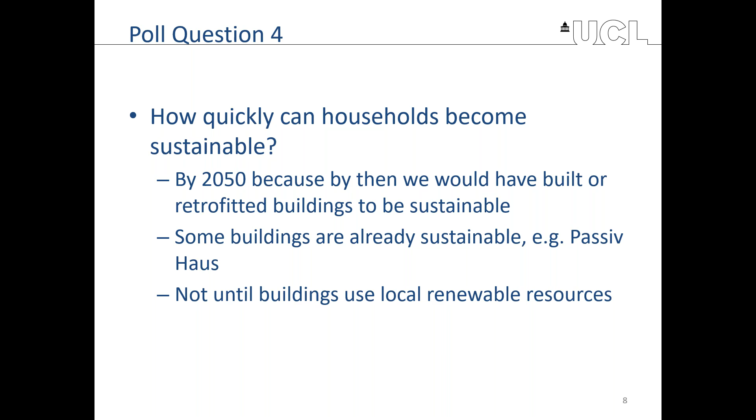But in fact, most interventions into building must tick the economic box. You would never invest in something that was economically infeasible. So in many respects, the economy takes a bigger circle, if you like, than all the other aspects. Now, we know we have to do environmental impact assessments, and there are minimum regulatory and legislative demands. So we know we have to do that environmental aspect of it. So we have to almost tick the boxes, and sometimes actually some of these assessments are tick box exercises.

And indeed, the society part, the social impact assessment, seems to have been tagged on almost to environmental impact assessments. So although, as I say, sustainability appears to be an equal weighting of all these things, in fact, they're not equally weighted at all. And this is one of the challenges to how deep sustainability assessment needs to be.

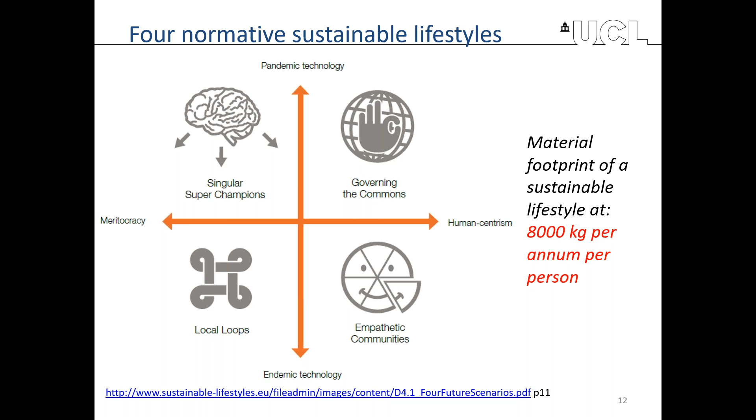To give you an idea of the scale of the challenge, 10,000 kilometers of travel in a car consumes 15,000 kilograms per person per annum. Public transport is far less, so it means that we'd actually encourage people not to use personal transport. Certainly 550 kilograms of food per annum was what you could do if you reduced your share of meat, fish and other seafoods. So again, food is a contributory factor, but I'm trying not to focus on all of the domains that we're interested in, just targeting the buildings.

So 37 square meters of personal heated living space costs us 10,000 kilograms per person per year, based on current ways of measuring. Now, already that's more than the 8,000 we're allowed. So the challenge is massive. When we were working on this project about 5 years ago, the average UK consumption was 40,000 kilograms per person per annum. So we're already at a scale 5 times too much to be sustainable. So it's a massive challenge on how to get here.

So in order to get this quantifiable footprint, we use these measures, but we had to have some caveats about the resources. Obviously, we pick up data about the resources used at a particular date. We don't get continuous updates on data, so your data is time-stamped, if you like. We can't get data for absolutely everything, so there are some gaps. And even with CO2 emissions, we do have some precision uncertainties. We can't be absolutely certain that we're measuring accurately. So already you can see that we can't be certain we can get exactly to this 8,000 kilograms per person per annum.

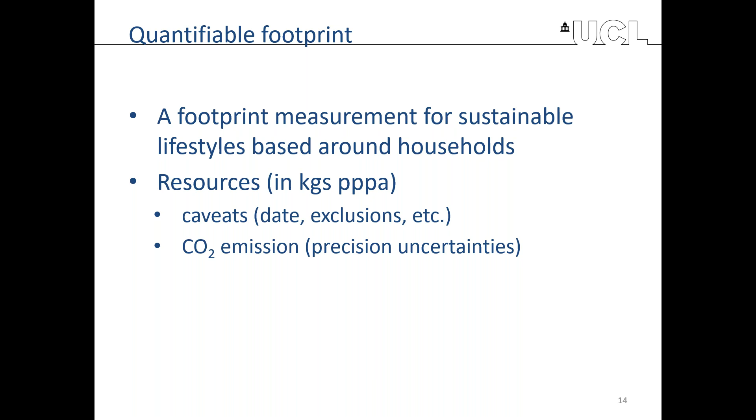So the 4 domains in the household envelope are the living domain, which is actually the building construction, the materials used for it, the insulation, the ventilation, the windows, the loft space, the floor, anything to do with the fabric of the building. Obviously, inside households, people consume food, and there are opportunities to reduce footprint through food innovations.

Obviously, mobility is a large part of the household, including space for the car, but actually the usage of the occupants in the house for consuming kilograms on mobility. And it's a trade-off then between, do you use it for heating or do you use it for your mobility? Likewise for energy. So on the energy domain, this is the ways that we heat and have power in the buildings.

Now, just to give you some examples so that you've got an idea of how these assessments are made and how these 4 interlapping areas can manifest when we look at particular innovations. So in terms of mobility, we might say, well, if you walk or cycle, that's great because you're not consuming kilograms, you're not contributing to CO2. So that's a really good sustainable innovation. In terms of the building, we might need a bike shed. So there's going to be some contribution to kilograms per person per annum because you might need some building to protect your bicycle.

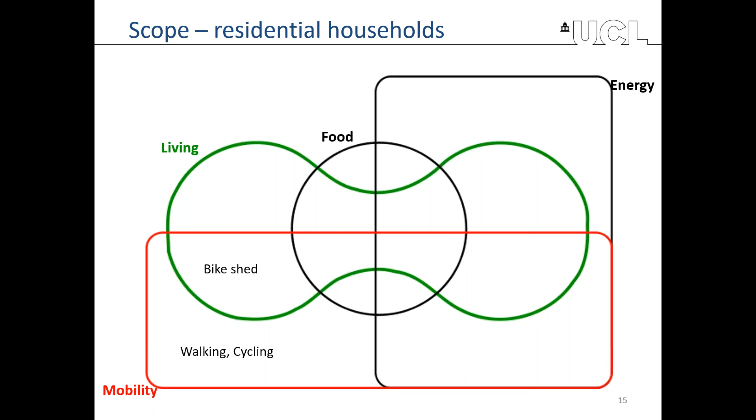If we look at the intersection of food, the residential building and mobility, then you might need a larder inside your building for travel food, and this could be some other storage means. If we don't consider the household fabric, you might say, well, we can use takeaways for food, but then that involves mobility.

So if we think about mobility and energy, we think about maybe internal combustion engine vehicles or electric vehicles. They contribute to kilograms per person per annum, but they don't affect the household particularly unless you think about charge points or maybe a garage to house the vehicle. If we want to think about food, you might look at the bio waste that you use for charging, maybe for electric vehicles.

And indeed, if you want to have the intersection of all four, you might think of bio waste that can be stored. So we might store some sort of generated electricity in a battery from food, but that can be used for the electric vehicle. So you can see how you can build up a map of all the innovations you might want to target in order to reduce your kilograms per person per annum.

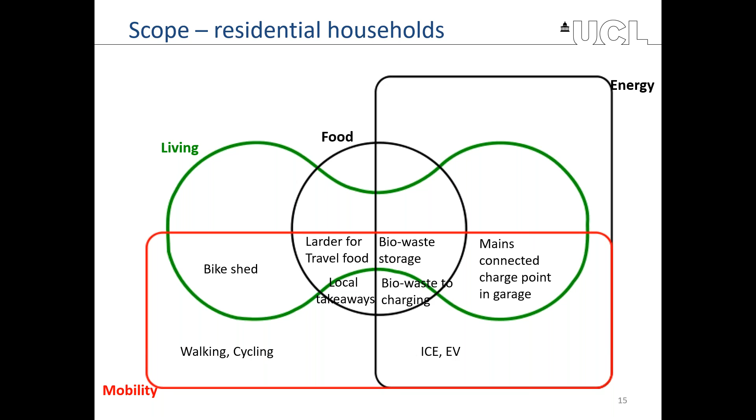Now, for these four domains, we need a way to describe each of the domains. And for the living domain, we've got these aspects of occupancy. So how many people in the building, how much space do they each have? What waste is there in the household? And this is not energy, so we're not worried about heat waste or food waste. This is just household waste.

What is the construction of the building? So what materials have been used? What insulation is involved? What is the location of the building? And by this we mean, is it in an urban environment or a rural environment? And what type of building is this?

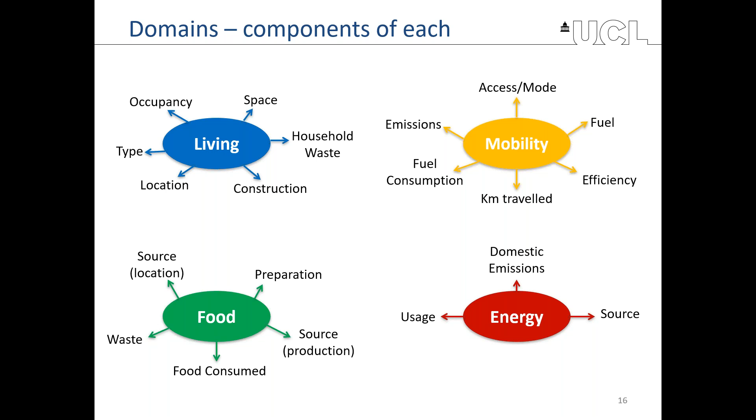And this aspect came up later in the day, this idea of living in a building that's not just designed for one family. So if you have some sort of shared facilities, even if it's just a shared corridor or lift or whatever it might be. So flats would be a type of building different from detached buildings, because it meant that you could benefit from others around you, because they would reduce your demands for living, even through shared walls or shared insulation, say loft insulation. So the type became actually quite important. I don't propose to go through these others, but I have got information if people want this.

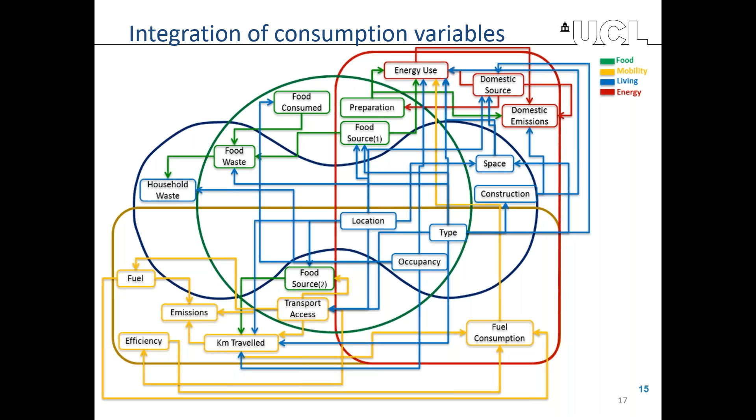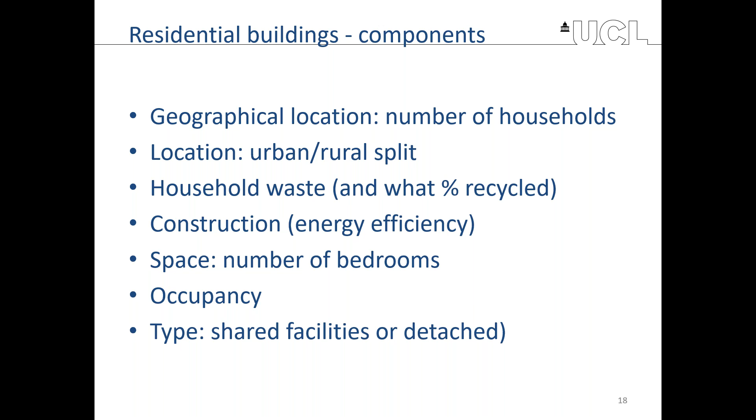So if you had less space to live in, it would mean you had less energy demand. If you had fewer people in the house, you would have fewer kilometers traveled. So these things are connected in multiple ways. I think I've actually discussed this with my previous slide, but this is just to confirm what the components of the residential buildings are. So I don't need to go through these again.

Now, we need to collect data about the households. And of course, we can't collect data about households for every location in Europe. So what we needed was a way for an input data stream to be created that was representative of the types of household, that would have all the data about occupancy, types of building and so on, but would not be geographical, but actually could represent a geographical location. So if you had all the data you needed about a city or a country or a region, you could provide that data, including how many households, and the model could then use it.

Now, the way to do this was to implement something that we call statistically representative distributions, or statistically accurate distributions. So you tell us how many houses there are of particular types. You tell us what the occupancy is. So say 2 people, there's a 20% chance that 2 people live in a particular house.

And the reason this is really useful is that national statistics can usually provide all the information we need because they're collected. And we've done this for 4 countries in Europe, and they were reasonably easy to get. But obviously regional statistics are available, and local statistics can be obtained as well. And just to give you an example of the sorts of information and how they differ between different countries.

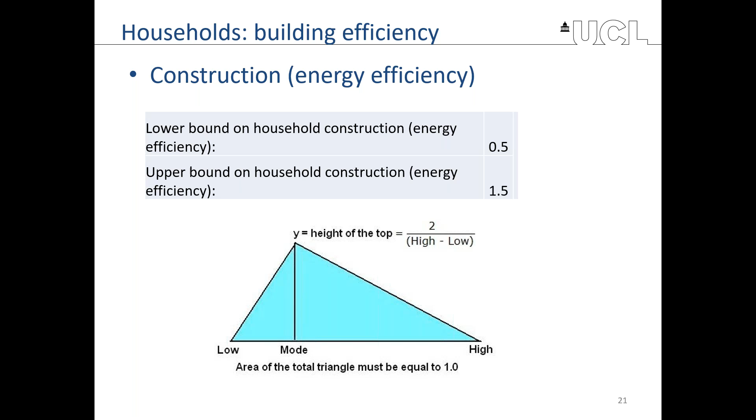Another example is the energy efficiency. So we used what's called a triangular distribution, where basically you give a lower and higher bound. So what's the minimum efficiency of a building? What's the lowest efficiency we expect? If our middle point is the mode, we expect households to be, say, 50% efficient, then some households could be 100% efficient, but maybe the lowest efficiency is 25%. So we have this idea of a representative distribution of where most households are. And these are also collected by energy agencies in different countries, so we can get this data as well.

Now, interdependencies are really important, and we tried to manage those by looking at the connections between the components on that really messy map that I showed you earlier. There are interdependencies not just between the domains, but between specific parts of the components. And we might assess the types of interdependency. Certainly, there's a co-location dependency. So if your electric vehicle is in a particular house with 2 people, those interdependencies matter because you're looking at the connections between those physically co-located entities.

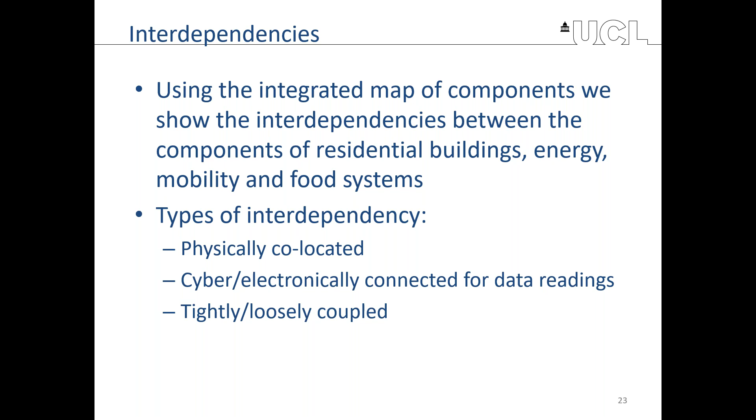So we create the model based on our map that I described. We can calibrate it to make sure that it does give us this 40,000 kilograms per person per annum if we run the model. So the answer from the model is about 40,000. I can tell you it doesn't come exactly to 40,000. It's within a small tolerance of that, usually a tolerance of 5%. We also tried to run the model using the spread scenarios. Now, this was to show that the model could actually give you an answer of 8,000 kilograms per person per annum if you implemented changes to the system.

So if you implemented changes to the housing, the occupancy, or to the materials that we use, you could actually result in this 8,000 kilograms. So we were happy that the model was giving you, if you like, the right calibrated results, because then we could try out user innovations.

But what we found actually was we could use the model to try out systemic innovations. So say we wanted more people in buildings. How could we increase occupancy? If we change the occupancy, without any innovation at all, we could actually see what the effect would be. So if we change the distribution that I showed you before to be skewed towards larger occupancy, then we could see that actually the 40,000 kilograms per person could come down to around 30,000. So already it's giving you a clue about the sorts of innovations you could do on a larger scale.

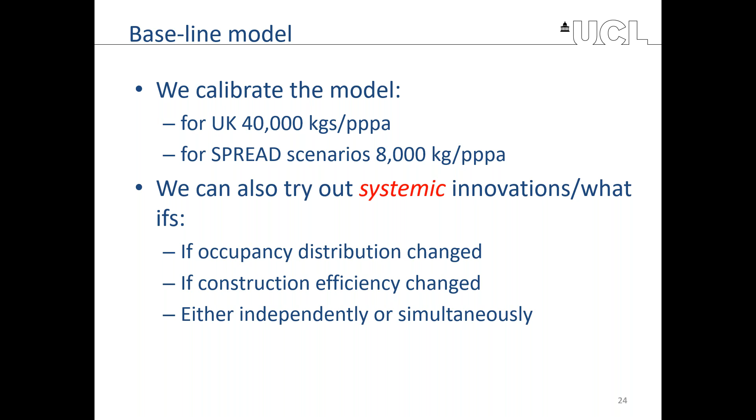Okay, so back to the actual project. The case studies that we used were developed by the guys in Holland and Sweden and Germany. So they were the ones that actually interviewed the people, the different types of innovation that we could do. Again, these are available, and I can give you more information if you ask me later.

We had people who would legitimate these innovations, basically people who would influence what we call social discourses, the narratives about how the niche innovations could become mainstream. You had user intermediaries who would help build those whole socio-technical systems, so both how society could interact with the innovation, as well as how the technological system could interact. And then you had the idea of user citizens, people who would challenge the dominant regimes and try to destabilize, a bit like the Arne Naess position, where you actually want to give primacy to the eco-centric position.

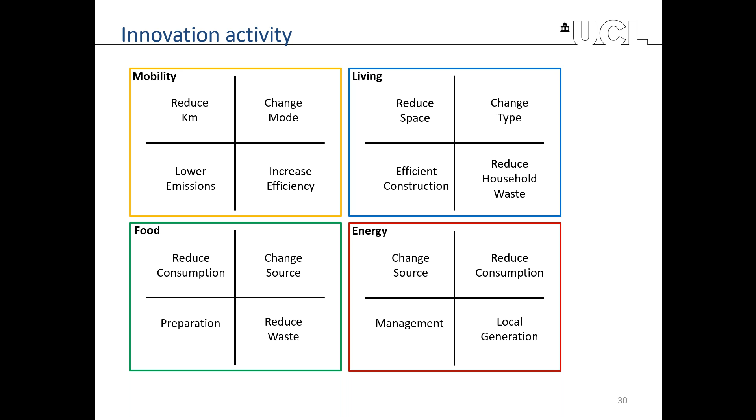Now, the particular innovation interventions for the living domain, so this is the top right-hand side, were brought down to 4 types. One was to reduce space, so to give, if you like, people less space. The other was to have more efficient buildings and construction materials: insulation, the whole building fabric, heating, windows, ventilation, and so on. A means to reduce household waste, and a change in type, so that we reduce the amount of detached buildings, essentially, so that they're more co-living or shared living.

Now, one of the important factors was that in looking at the whole system together, we needed to look at the household heat loss. So this was the integration, if you like, of the household with the energy domain, because they influence each other directly. So the hot water, the lighting, the appliances that are used, the cooking means, the human body heat, all these are very interrelated and affect the total that we come out with, affect the kilograms per person per annum, particularly in respect of heat loss.

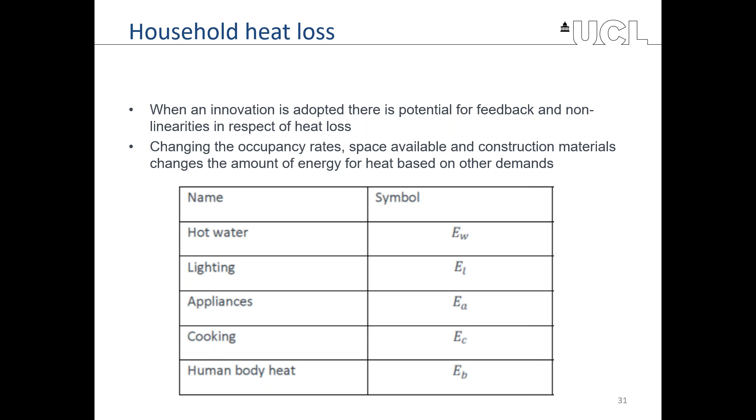Now we can run the model then, which assumes that everyone adopts the innovation. Of course, the challenge is that in reality, not everyone adopts an innovation. There are people who have never used the innovation, so the people who feel excluded from it, or the people who resist an innovation and will never use it. If you like, this is the inertia in the system. And there are also people who have stopped using an innovation, people who've been expelled from using it for whatever reason, or people who have tried but didn't like it and rejected the innovation. So there's never 100% of people who can adopt a particular innovation.

So just a warning to say, of course, the model is not the same as the real thing, for all the reasons I've described already. So what we do is our best to represent the system how it is, based on some a priori description of how we understand the system. And what we try to do is to give some insight into the effects of the change that could happen, but with it comes this list of assumptions and caveats, because we can't get all the data, we can't know how quickly things will diffuse.

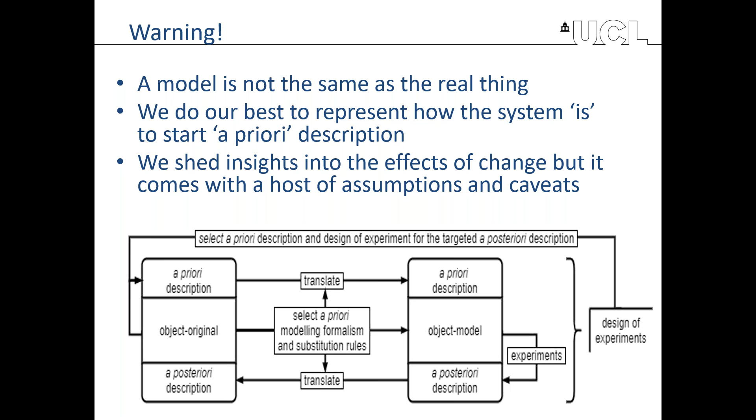So some of the caveats I've mentioned already, but the scaling one is particularly important. We model in the UK roughly 28 million households. We have 10,000 agents in our model, so each agent represents 2,800 real households. It's not a one-for-one mapping. If we tried to run the model with 28 million households, the model would still be running now and not be able to give us any insights, because the processing time for these large-scale models is still not fast enough.

CO2: we know roughly what the CO2 measure is, but of course technologies continuously improve and reduce the emissions. So we have to have some assumption about how much better the CO2 emissions will be over time. So what we do is give you a result that is the mean of the 95% sensitivity interval. It means that we run the model hundreds and thousands of times, and we tell you that 95% of the results are within this range, and we give you the mean of that. So these are the figures we actually give you.

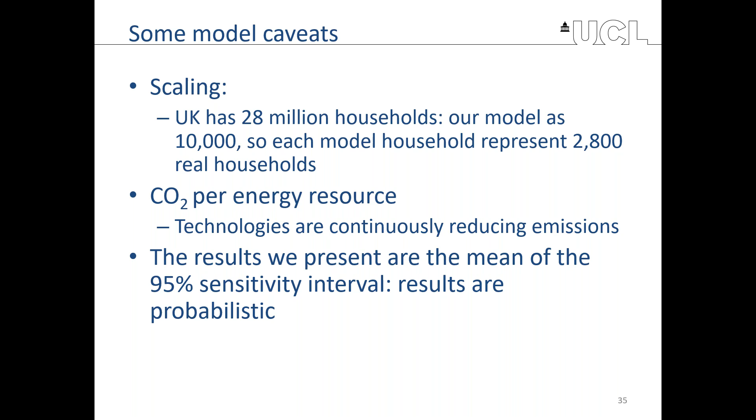And so some of the figures to contemplate: if we assume that half of the population have adopted a particular innovation, say raising the occupancy level or changing the materials, so this is the second one, the construction material innovation.

We can tell you that in the UK, we're going to reduce the kilograms per person per annum by over 4,000. Similarly in Germany, but less so in Spain. So their starting position is better with their construction materials innovation. So if you like, it's an innovation that might not be such a high priority for them, because it won't make as much improvement as it will in the UK or Germany.

In terms of the CO2 emissions, however, both in UK and Germany, you're going to make a really big impact. Like 20% CO2 emissions reduction is significant. So they might well be worth investing in just for the sake of reducing CO2 emissions. I have the electric vehicle statistics there, and they're only interesting because although the kilograms per person reduces massively actually in Germany, what happens is that the CO2 emissions increases. And this is because the UK and German grids are not as clean as the Spanish ones.

So you can see already there's a trade-off between investing in innovation. You actually want it to tick all the boxes of reducing CO2 and reducing kilograms per person per annum. And if it doesn't reduce, for example, in CO2, you can see that there's an action plan then to get the grid to be improved so it does become cleaner.

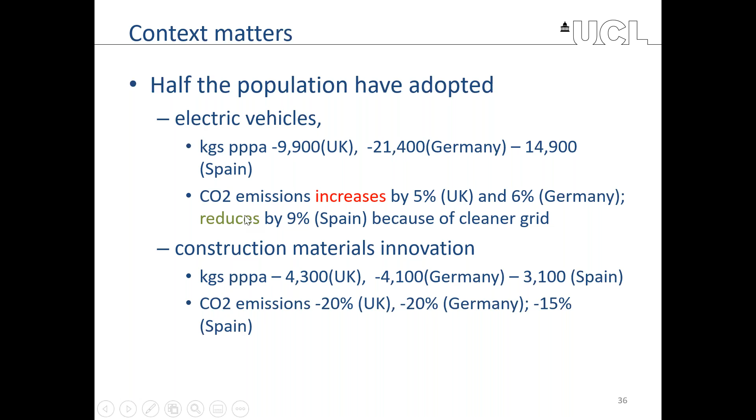Okay, oops. Can you still hear me? Yeah, I can still hear you. Okay, thanks, Jordan. Right, so I'm on the last bit now, so I know I'm coming up to quarter to, or I'm just at there.

And just in terms of the rate of adoption, as I said before, we have to have some baseline for the rate of adoption. But actually, if we adopt slowly, it has an impact on the non-renewable resources that we're using before we actually have the full adoption. So this idea of we're creating a cumulative problem, because we're adding to the emissions in the environment which aren't going away, and we're also reducing the global stock of non-renewable materials. So the rate of adoption matters.

And of course, the population continues to change, and we do try to account for that. Because we know that there's new housing stock, and we know that there's a reduction in old housing stock. But of course, the majority of housing stock is not new. And so we see already that retrofit innovations have the greatest impact. But inertia is a real challenge, because we can't mandate some of these innovations. And also we have the people who don't adopt as well.

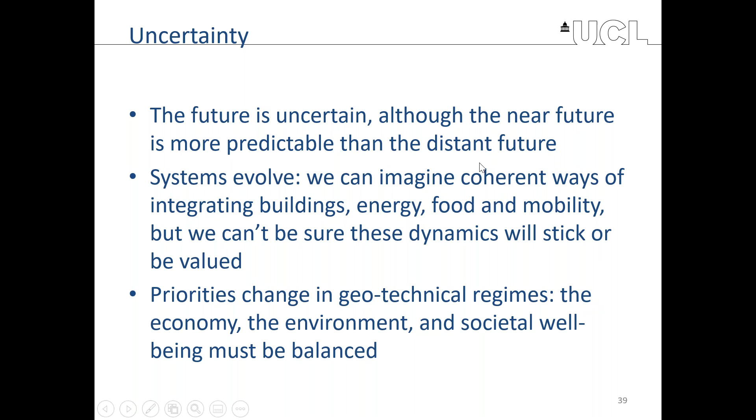Okay, hopefully you can see that now. Yep.